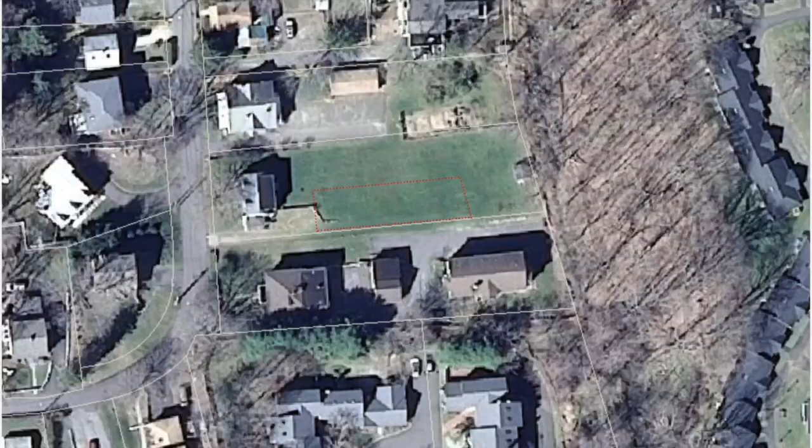It is 7 o'clock on Thursday, September 14th, 2023. And this is the regularly scheduled meeting of the Town of Ridgefield Inland Wetlands Board. In attendance, we have Carson Fincham, Chris Phelps, Alan Pilch, myself, Susan Baker, staff members Artie Paranjape and Caleb. Sorry, Caleb.

Anyway, as this is a public hearing, we will ask Caleb to please read in documents received since last time before we get started. Yes. Okay, so we have the 2004 Connecticut Stormwater Quality Manual, Amy Zemba's resume, extension letter dated August 24th, 2023, correspondence 69 in total, site plan dated September 8th, 2023, drainage report dated September 7th, 2023, LandTech response to Stephen Danzer memo, and Steve Trinkus review dated September 13th, 2023.

We also have documents that have been uploaded starting at 5:20 today. Ridgefield MLS rentals as of 8/30/2023, 8-30g Affordable Appeals List 2022, 27 Abbott PowerPoint presentation dated 8/24/2023, another 27 Abbott PowerPoint presentation dated 8/24/2023, 27 Abbott Avenue previous approval versus approval proposal exhibit, comment response letter to Artel Engineering, comment response letter to the commission, comment response letter to Steve Trinkus.

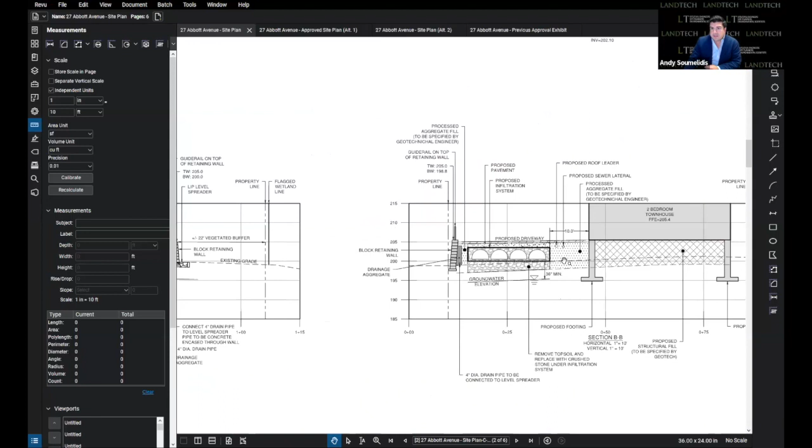Another comment or question was the type of fill material to be used on the site. That's really going to come from a geotechnical engineer who hasn't been engaged yet, but we did put in here that clean structural fill will be supplied below buildings, and clean process aggregate below the pavement areas.

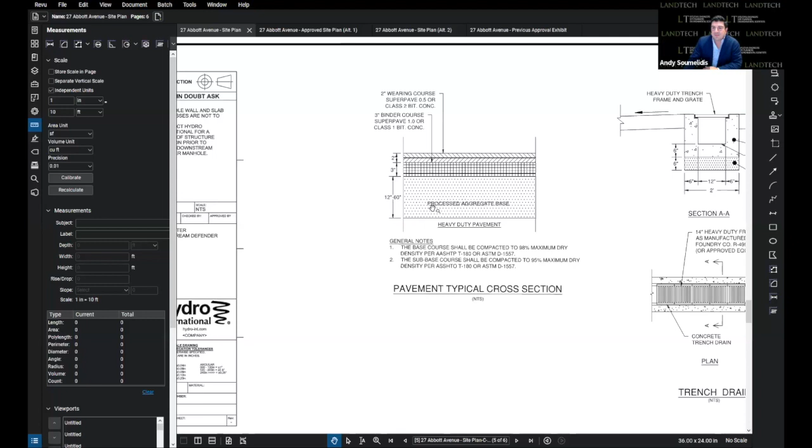So on our detail, let me fast forward. We're showing process aggregate below the paved areas, from 12 inches to 60 inches, so crushed stone aggregate. It's a material that can compact, getting 98% compaction, in order to have a nice smooth driveway. That's what we're proposing for the fill areas below the buildings and under the paved areas.

Another one of the concerns was the bathtub effect or mounding effect with our drainage system sitting between impermeable concrete retaining walls, and how the water is going to drain out. Once it goes through the infiltration system, it's going to create a bathtub effect within the system.

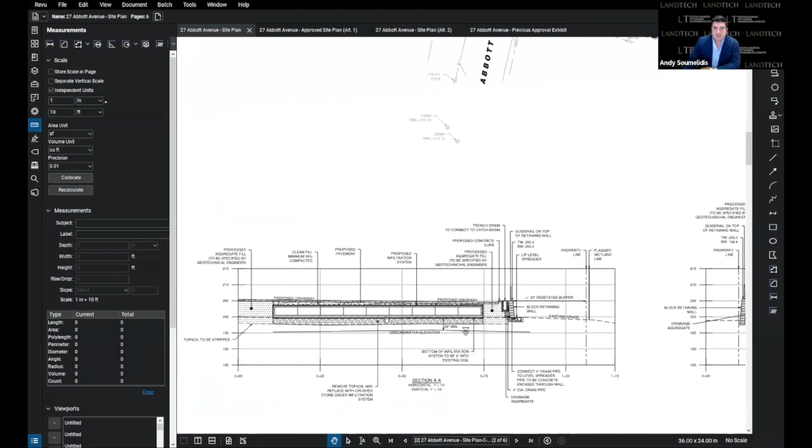So we've added these additional cross sections, further detailing them. What we did was go from a concrete wall with impermeable liner behind it to a block retaining wall. The purpose was that the block retaining wall can have shallow footings. A concrete wall would have to go below the frost depth with a footing, 42 inches below the existing grade, which is this line here. You'd have to go deeper into the existing grade, which would impede the water.

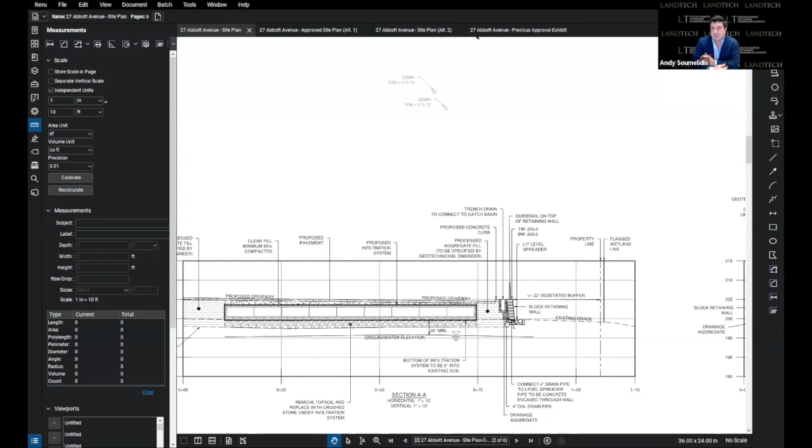What we did in our previous approval to remedy that was basically put weep holes within that concrete wall. Your third-party reviewer was okay with that and wasn't concerned with mounding, but we still heard concerns from the commission regarding the mounding. So with this concrete block wall, you basically bury one block, an 8-inch block, into the existing grade, so it sits a lot higher than being down here with your footing. This allows the free passage of water, not impeding the natural flow of that water going beneath the wall and out towards the wetlands. So we remedied that by doing a block wall.

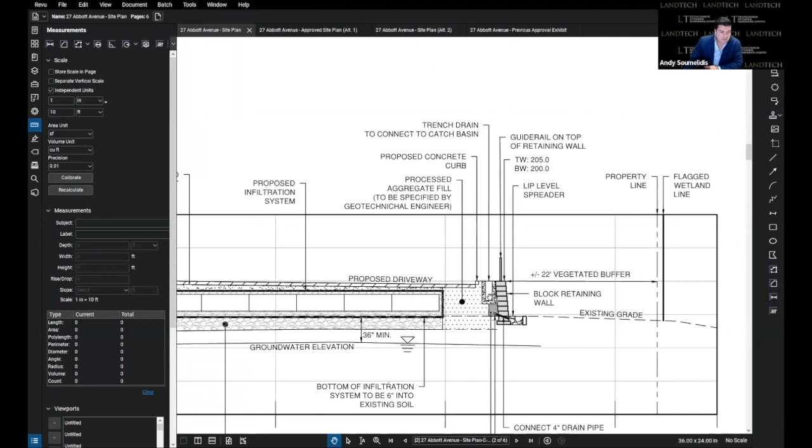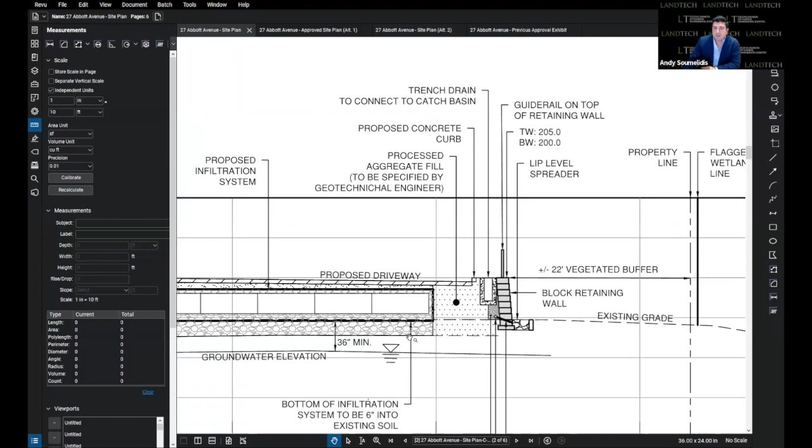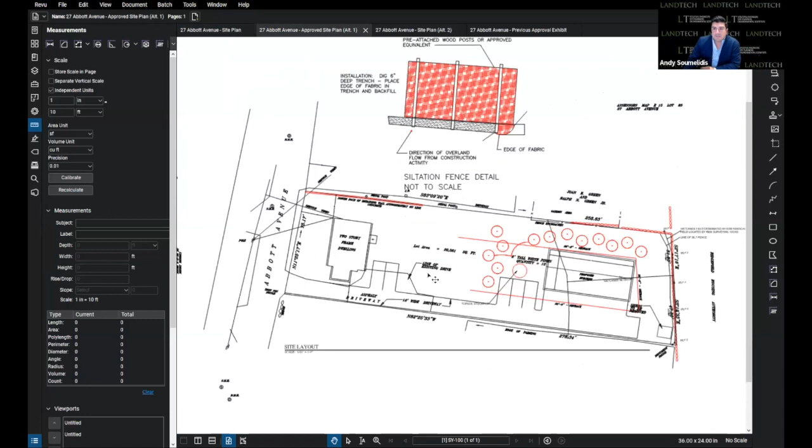Another question or comment was the alternatives. We submitted alternatives, and I'm just going to run through them again with you. This is the approved site plan from this commission. The approval was to maintain that existing dwelling in the front, with a driveway going to the rear to service a new multifamily building in the rear.

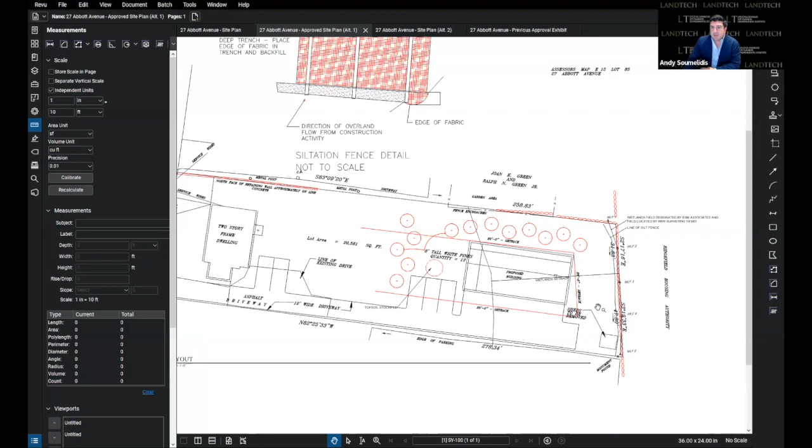That building is 25 feet off the wetlands. As you can see on this plan, there's no proposed buffer and no proposed stormwater infrastructure. There are some pine trees planted in between, I presume, for screening from the neighbor to the north. But again, no stormwater infrastructure proposal, no buffer plantings, and more encroachment towards the wetlands. This is an approved plan that could be built today through this commission. Understood it needs a building permit, but no further review from this commission.

We also presented another alternative that kept all the work outside the 100-foot regulated area.

This again would be more of an apartment style building where you drive underneath with parking underneath the building. That would be 1 story, and then 3 stories above that. You can get 27 spaces here, probably more density. Again, this is another alternative.

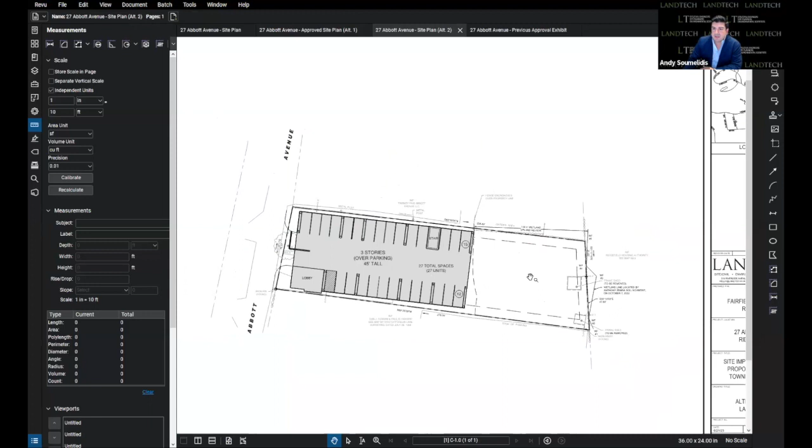We didn't flesh out all the details in terms of grading, drainage, and the such, but we feel we can keep a building outside the regulated area with this type of proposal. I think it would increase the density and probably not fit in with the character of the neighborhood. This exhibit compares that previously approved plan to what we're proposing. All we're showing here is really the impervious surfaces.

You have that existing dwelling to remain in blue here. Outlined here is the limits of that asphalt driveway. And then behind here, you can see the limits of our driveway in our building. The driveway encroaches closer to the wetlands than what's currently approved, and the building encroaches closer to the wetlands than what's currently approved.

We could theoretically put a building in between the two buildings and get the same density we require and move forward with an application, not having closer impact to the buffer than was previously approved, with no buffer in between, quite frankly, because there's no plantings proposed and no stormwater improvements. Yes, perhaps when we go through zoning, we would need to include some stormwater improvements, but through this commission, it was approved as such.

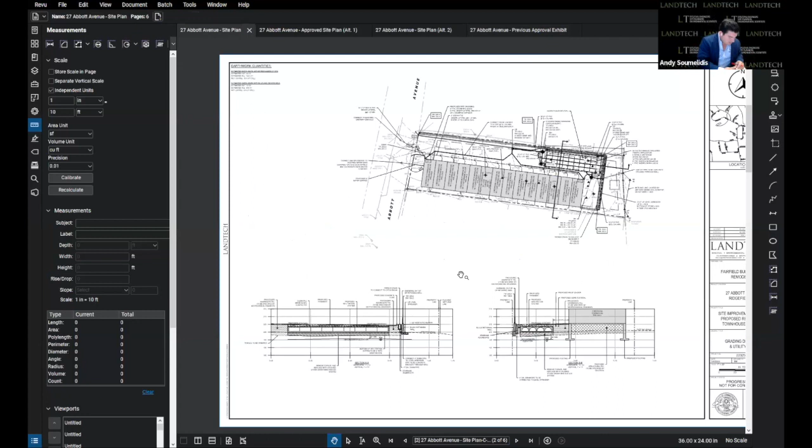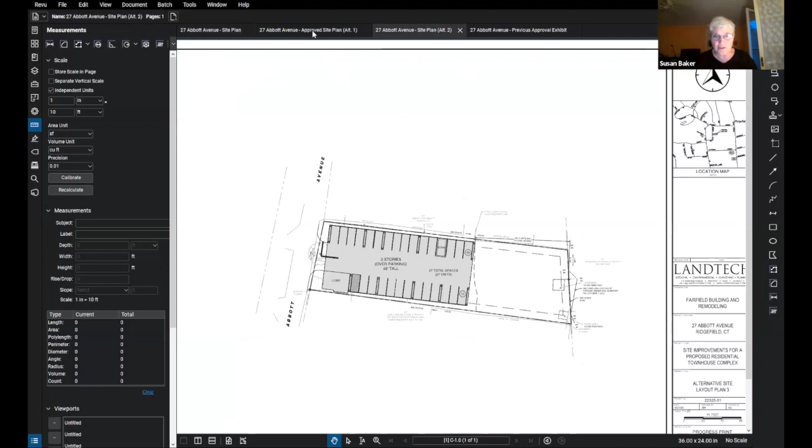I'm sorry, Mr. Soumelidis, you presented, I think, originally 3 different alternatives. Was that alternative one you just showed us? I don't think we had seen that as a suggestion before. Which one? This one? This is not an alternative, this is just a comparison. This is a new graphic, correct? Yes. I just wanted to clarify that this is an absolutely new graphic that was uploaded today, correct? Okay, so no one had a chance to look at that. Sure. This is just a comparison.

If all of you in your presentation tonight could specify when you show us something that came in after hours today, that would be helpful. This is the only exhibit that came after hours. The rest were responses to comments in written form, which we are doing verbally as well. Okay, because I thought there were some PowerPoints. Were those all presented earlier? Yes, this is Brian Carey for the record. Those were PowerPoints that were presented during previous meetings, and I think they were actually uploaded previously. My apologies, the record is so large now. I just wanted to make sure it was in there, but those PowerPoints were previously uploaded.

Okay. And just as a point to make here, I don't know that if you have an approval for something in the wetlands like this, that you could just go back and add to this approval another building. I don't see how that works, because the previous board would not have had a chance to see the whole picture that you were planning to do. Sure, but if we build this today, then we can propose a new building outside the 100-foot wetland regulated area, which is in here. Would it need to come before your commission is my understanding? I don't know. I'd have to check with counsel on that one. Right. That's where I was getting at with it.

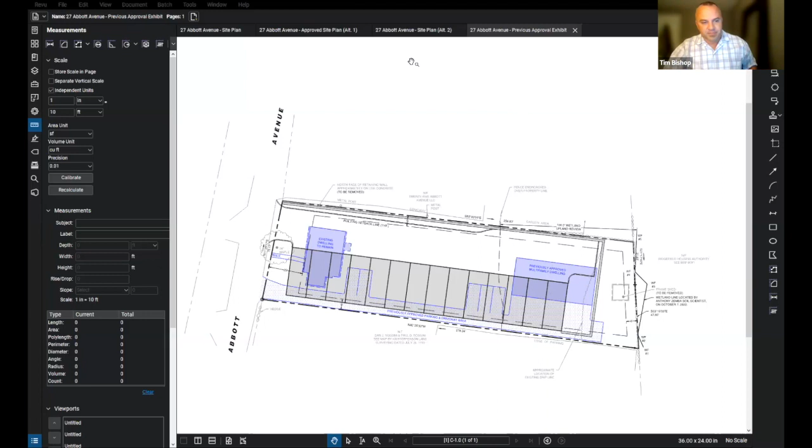Okay. So, yeah, if there's a potential adverse impact to wetlands or watercourses, we have the authority to regulate it. Thank you, Tim. Regardless of upland review distance. Okay, I just didn't want things to get confusing. Sure. I just want to make sure we're clarifying this isn't anything new. This is our existing site plan with that alternate that you've already seen. So this is not a new alternate, this is just an exhibit showing a comparison. Okay, thank you, that's all for clarity.

Okay, and I think lastly, from the commission, in terms of stormwater, I would say, because I think Brian's gonna touch on some of the other aspects, was the snow removal.

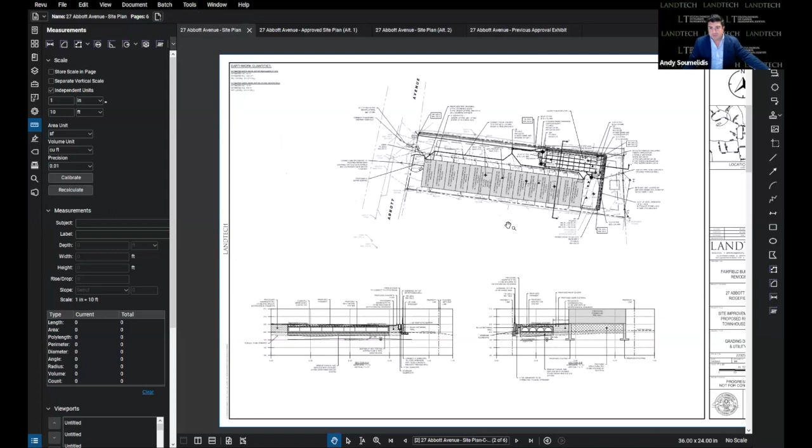Which was a very valid concern. So what we did was, as always, we said this area here would be the snow removal area. But what we didn't have, which we did add, was a trench drain along the top of this wall now. So during snow melt, all that snow melt is still gonna get the same treatment as you would during a rain event. That's typically not likely what happens when people carve out snow removal areas.

But in this instance, we thought it was important to add that trench drain. This trench drain is connected to this catch basin. This catch basin goes to this manhole. That goes through the swirl chamber, the hydrodynamic separator, through the infiltration system. So during a snow event, just like a rain event, you're gonna get the same proper treatment of that: TSS removals, the oils, greases, nitrogen, and so on and so forth. So I think that was all the comments from the commission.

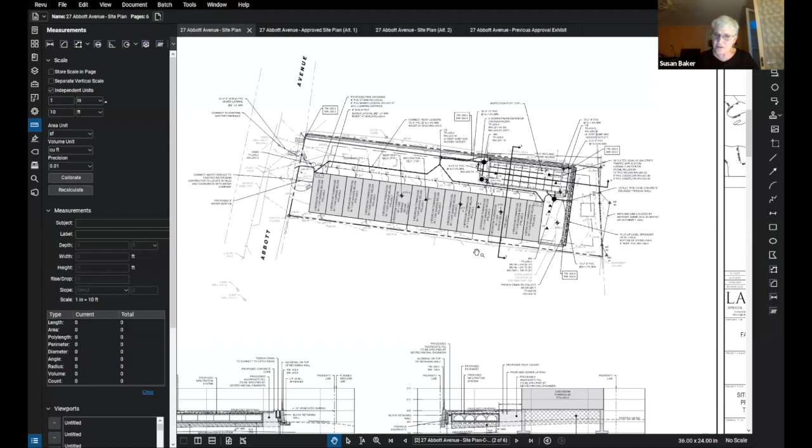May I ask one more question? Sure. Just since we were on the subject of alternatives, I don't think you showed us alternative 2. Maybe not tonight. I might have presented it at a different one. Is what you're saying? Yes, and I thought if we're gonna look at alternatives, maybe we should look at them all one more time. What was alternative 2? It had a bigger apartment building at the end of that row. Yeah, that was the one.

Let me pull that up. I think Brian has that as part of his. Is that okay that he shares that? I can share the screen right now, Andy. I have it up. Okay. Go ahead. Pull that one up. Sorry, it's a little bit.

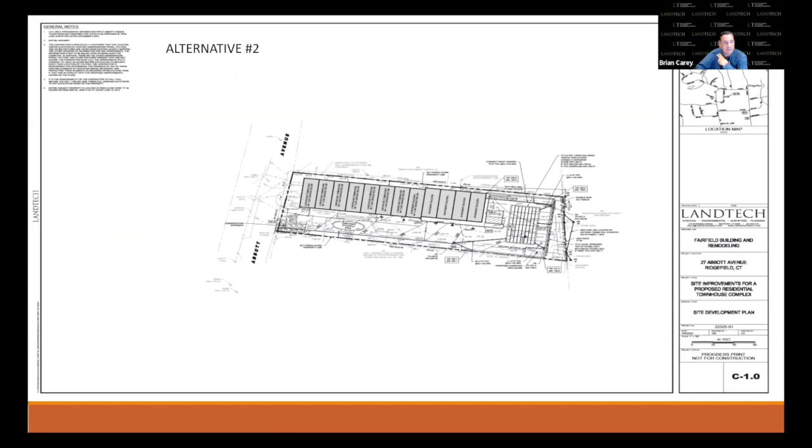But this was a denser proposal as far as apartments. It was a mix of apartments and townhouses. So there's been multiple alternatives that we've worked through, probably more than what we're even listing now, just based on our response to comments received from the third party review and staff, but this was one of the ones that was first presented. So initially we presented alternative 1, which was the approved plan. Obviously, always an alternative is the no build scenario, which is just maintaining the house. We went through, I think in the record, how that wasn't found feasible or prudent.

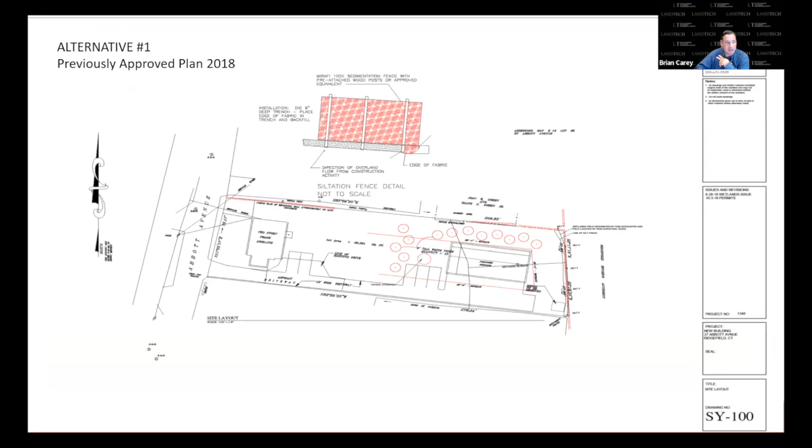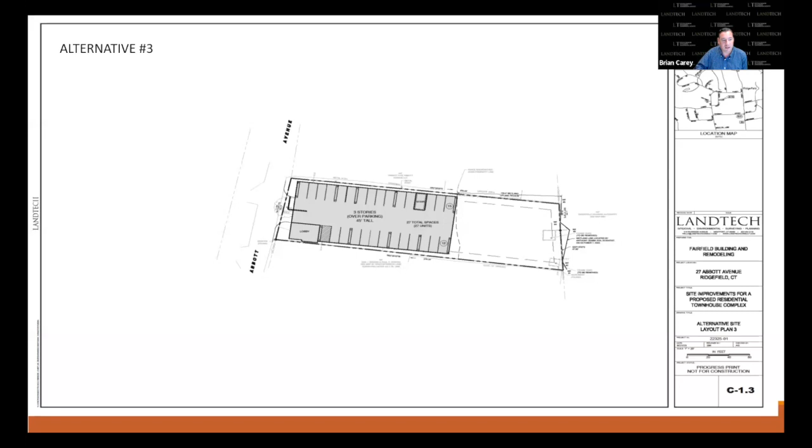This was alternative 3 that we had looked at prior to submitting to the commission. This was one of the alternatives that was shown based on response to comments from members of the commission asking to see what development could be handled outside the 100-foot review area. And then this was a preferred alternative, but we've reworked this as well based on comments received by, again, third-party review and the commission. So Andy, I'll let you show again the preferred alternative.

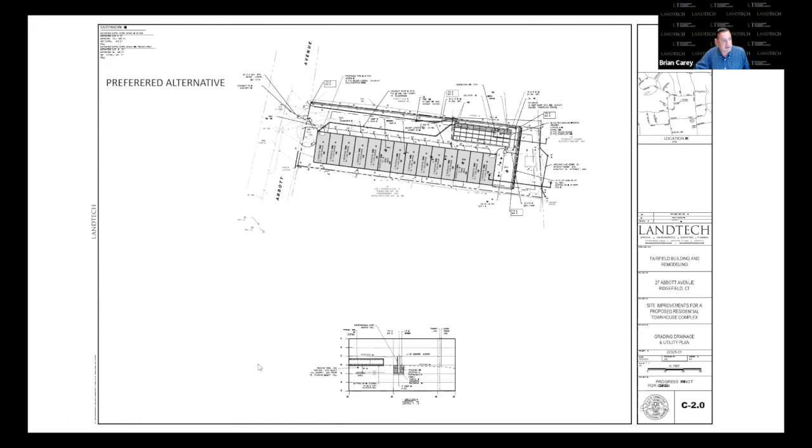I would say this was the preferred alternative 1A because we have updated this to identify and basically address comments that were shared to us. So the new set of plans is our preferred alternative because we do think it's feasible and prudent. It addresses the concerns we've received so far from the third party review, the commission's comments, and it's a better plan working through the comments. So I'll stop sharing and Andy can bring back up his.

Thank you. Appreciate it. We did not, just for the sake of confusion, enter alternatives every time we changed the plan to address comments. We'd be up to alternative 12 or 13 at this point. So just to keep the record straight and not that confusing, I do think we've provided alternatives to show that this does meet the preferred alternative of the applicant while being protective of wetlands. Okay, appreciate that. And that's how we would expect it to be done. Okay, I'm sorry to have interrupted Mr. Soumelidis. No worries.

I'd like now to run through Mr. Trinkus's comments dated August 10th. I haven't seen anything based on our latest submission, but I just want to run through those and how we addressed those as well. The first comment was in relation to soil testing and more soil testing. So we went out there and did deep test holes in the 4 corners of the proposed system.

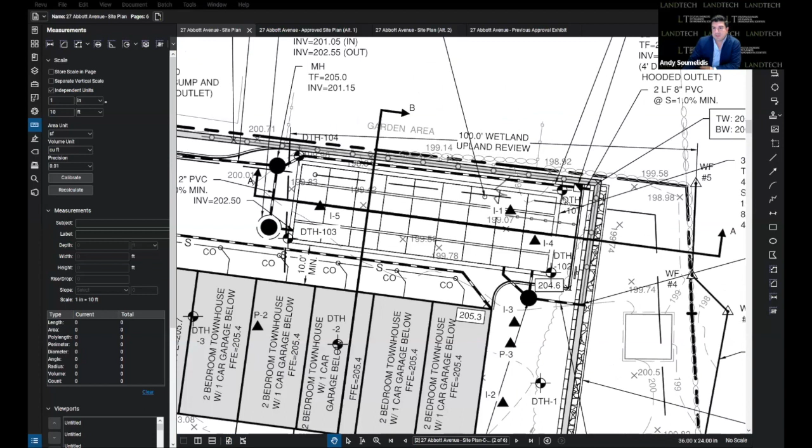Some of the concern was the material that was found in this test hole here, test hole 1, had some fill with some miscellaneous debris in it that didn't seem suitable to belong below an infiltration system. So we did additional testing in all four corners to confirm that there is no miscellaneous debris in that fill. We furthermore did additional infiltration testing, double ring infiltrometer testing, not percolation testing, to determine infiltration rates. Those also concurred with our original results of a 1 inch and 15 percolation rate.

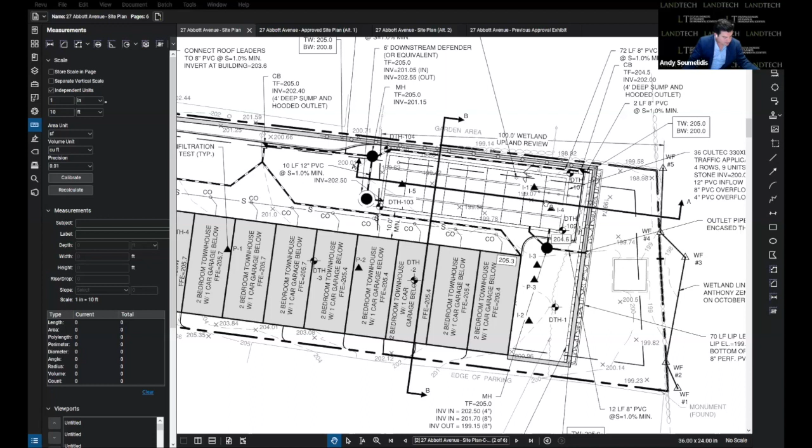So I think we've done some significant testing throughout the site, specifically within the limits of the underground infiltration system. So I think that addressed comments 1 and 2, which were related to deep test and infiltration testing. Comment number 3, again, related to soil testing. Groundwater elevations cannot be confirmed because there was no testing there.

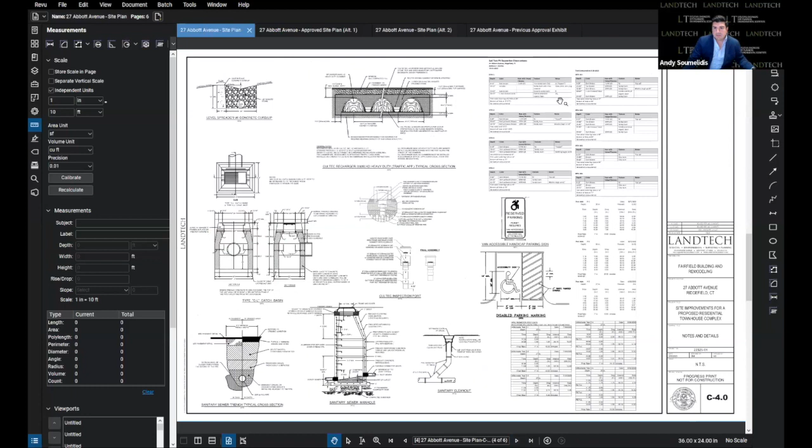Well, testing was done, and the proper groundwater elevation, which is part of this set, was added to all of our testing here. So we confirmed the groundwater elevation, and it is shown as well in our cross section. Cross section A has been revised. This was the cross section to determine the limits of fill. In cross section A here, you could see where the limits of fill are.

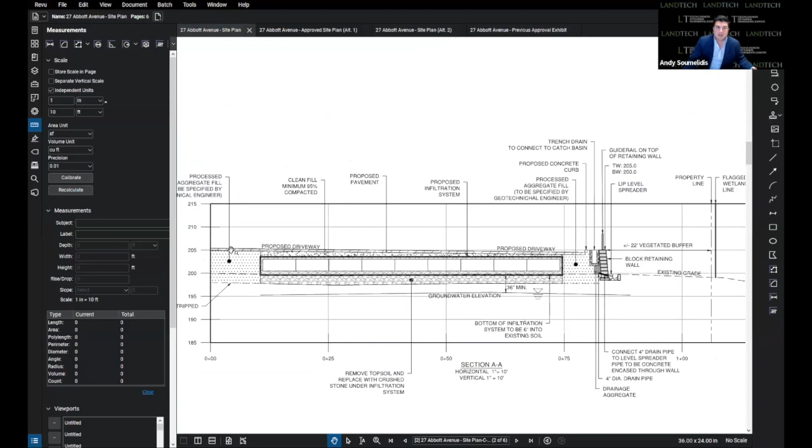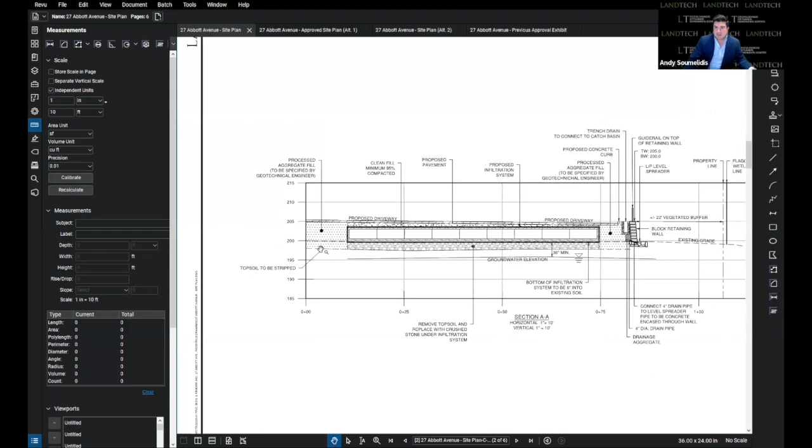This dash line here shows existing grade. This shows finished grade. This calls out precisely where the fill is in relation to the finished grade. We have also detailed that we would strip the topsoil throughout the site and then bring up the necessary fill, obviously to get the right compaction below our paved areas.

Comment 6 was in relation to the isolator row. Seemed like nobody liked that. The isolator row is a row in an infiltration system that's basically wrapped in filter fabric, and all the effluent goes in there originally and then disperses throughout the rest of the system. The isolator row helps settle out the fines so they don't infiltrate throughout the entire system. Nobody was a fan of that. So what we did was add that hydrodynamic separator to make sure we got all of the fines out before any of the stormwater enters into the system.

Comment 7 was the weep holes. Nobody was a fan of the weep holes, it sounded like, either, other than the third-party reviewer who had no issues with our quote-unquote bathtub effect. But we did modify that again to be a modular block retaining wall now, with a shallow footing that is associated with those types of walls. So again, the weep holes have been eliminated. I think that answers comments 7 and 8.

Comment number 9 was in relation to this catch basin bubbling out on a 100-year storm event. That didn't bubble out on our previous proposal, and it doesn't bubble out again on this proposal. So it never bubbled out from the last time we spoke. Since this comment was addressed to those plans, it didn't bubble out of there. So I think that comment was just invalid.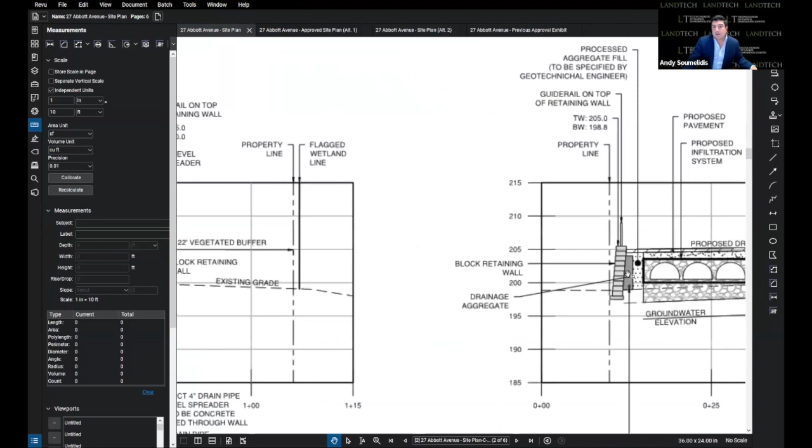Another comment was the footings, the type of footings that would be with a concrete wall, and how they would extend into our neighboring property. As you can see, this is again a block retaining wall. You basically stack these large blocks against each other, they taper back, and there's no footing that's required. It's basically 6 inches of crushed stone that it sits on, and then you stack the blocks above that. So there's no footing. These big blocks just act as a footing themselves, essentially, and they're shallow footings.

The other concern was the snow storage, where we're doing the snow storage, and during a snow melt, it would go untreated into the wetlands. As I mentioned earlier, we did add this trench drain that's connected into our stormwater system that goes through the proper treatment.

Comment 12 was the water quality is held at a fixed storage below the system, and we're not getting the proper treatment. We were getting the proper treatment. So I think that comment is invalid. But for belts and suspenders, we added the hydrodynamic separator. Again, that gets you 100% TSS removal based on the proprietary system, based on the manual, based on the product specification. So that has been added. So I think we got the belts and suspenders there for the treatment.

Comment 13 was talking again about the drawdown of this system. Again, we disagree with that comment, and the drawdown calculations were done correctly. Comment 14 was the MS4 disconnected impervious areas. We've added some language in there to clearly spell out what the MS4 is intended for and how our project is 100% completely disconnected impervious. What that means is all of our new impervious surfaces are being captured and put into a detention system.

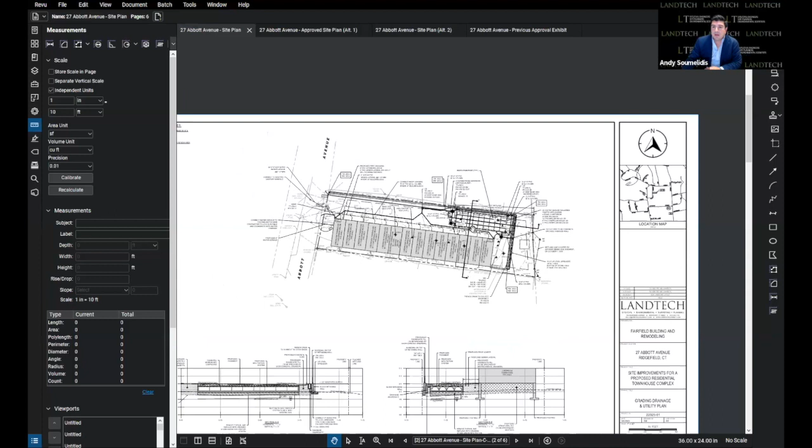But it was a concern of the third-party reviewer for the neighbors. I wouldn't call them a third-party review, the neighbors' consultants. So we addressed that. And I think the last comment was regarding silt fencing, and I think we did a good job now in the construction sequence of really spelling out how this should get constructed

in terms of an E&S perspective. The last concern at the last hearing was we're going to put in this retaining wall and there's no room to put in a silt fence. There's no room to put any protections on that side. So there is silt fence along the rear of the property. This wall, once constructed, would act as the barrier.

It's a fill wall. That means you're digging down minimally to put in a footing and put in that wall, and you build that wall to its top height. After it reaches its height, then you could build in the rest of the infrastructure. As you saw in the cross section, the infiltration system sits below that. It all gets filled in.

So what would happen here is the wall would act as a barrier on the northern side. You still have erosion controls on the eastern and southern boundary of the property. Double row silt fence as required. Those were the comments from the engineer's third party.

I'm going to quickly run through, and I think we did at the last hearing, Mr. Verbicus's comments, which were some cleanup of the general construction notes, and this is the August 24th comment letter. The construction notes on sheet L1 have been revised. The fill material was another comment that you've heard of earlier that we've addressed.

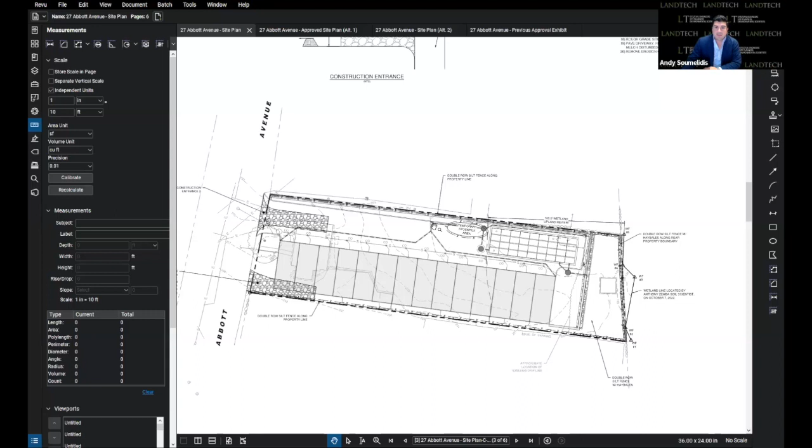Comment 5 was in relation to basically the geometry of the pipe bends and how they were going into the stormwater system. So we cleaned those up as well. And comment 6 was basically just showing the water lateral, which we showed connecting into the building. As stated, it's not a wetland issue, but it was a comment.

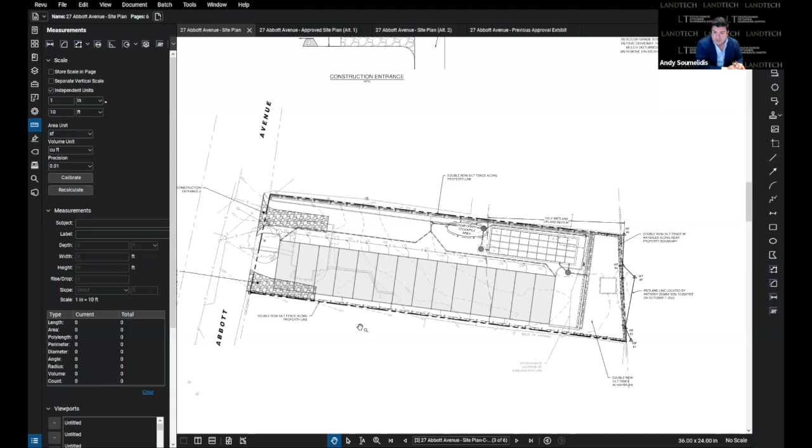The comment we received about 15 minutes ago, also not having enough time to really review it for this hearing. So this is dated September 14th. The first comment was in regards to soil testing. You heard that already earlier. The extensive testing we did for this infiltration system.

Just to be clear, the manual requires one test hole in the vicinity of this detention system. We have, I would say, 6 test holes in the vicinity of this infiltration system. Deep test holes. And 1, 2, 3, 4, 5, 6, 7 actually, infiltration testing in the vicinity of this detention system.

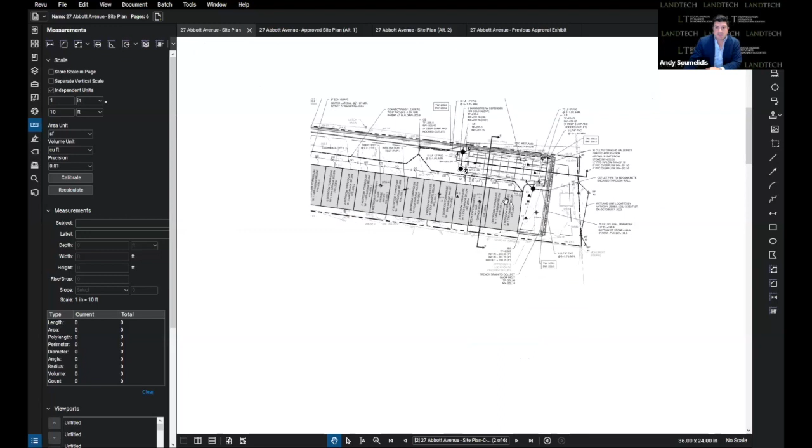Comment number 2 was in relation to the segmental block wall. Again, the pipe that discharges out from the segmental block wall, which is basically drainage behind a wall, is greater than 10 feet away from our infiltration system. Plus the bottom of our infiltration system is below. You can see here the crushed stone goes way below the invert of that segmental block wall.

So I don't see how the water short circuits. Short circuit would be if the water went right in here and didn't get the proper treatment through the 3 feet of unsaturated soil, which you would get here. So I'm not sure where he's concerned about that.

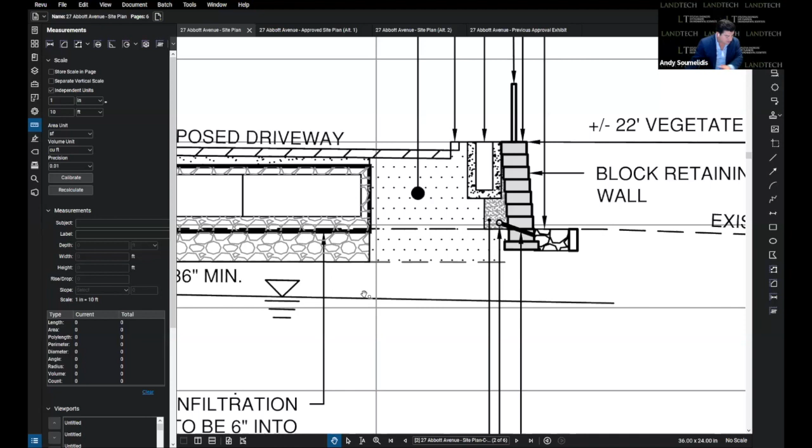Comment 3 was the wall and drainage structure should be drawn to scale. I'm not sure where that is in relation to. He doesn't point out, so I'm not sure if it's in plan view, section view, or one of the details. Seems like just for clarity. Number 4, cleanouts are recommended for roof drains. More than happy to provide cleanouts at these bends to get into the roof leaders. Not an issue at all.

And then comment 5 was the stormwater modeling shall be updated separately. This is the one I really had a question on. I'm not sure where he was going with this or what the question is. Proposed 8-inch diameter pipe appears to restrict flow. In our model, we are reducing the flows for all the storm events up to the 50-year storm. So I'm not sure what that comment really means, honestly. So that's the one I really needed clarity on.

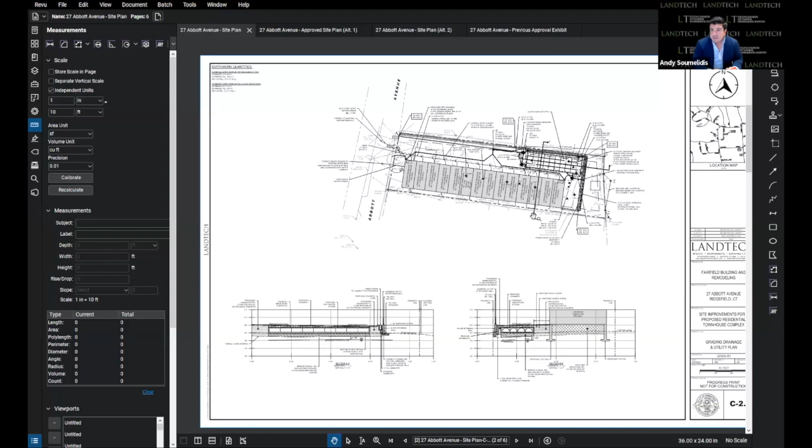Our drainage system, as you heard from Mr. Verbikis at the last hearing, was sized properly, was designed properly, would provide the runoff reduction, would provide the water quality. I think what we've done here is add more belts and suspenders to it. So that's what I have as my presentation. I'm going to hand it over to Brian, unless you guys have questions right now on the stormwater issues. I'm more than happy to answer now.

Any members at this time have questions that Mr. Soumelidis could speak to? Just one clarification. Tracy, yes. I think the board said we were concerned about soils and permeable pavers. There wasn't clarity. There seemed to be one of the peer reviewers said that the soils couldn't handle infiltration from permeable pavers. So I think what our comment was, we wanted the engineers to figure that out. And we didn't feel like we could really say yes to that until that was resolved. So just for clarity, that was our comment. But we said we would leave that to the engineers to figure out.

Sure. Do you know who mentioned that? I think Mr. Trinkaus was concerned about the soils being able to handle the permeable pavers. So I personally didn't feel like I could recommend them until that was resolved. Sure.

Alan? Yes, just a question for you, Mr. Soumelidis. On your drawing C-2.0, you're now showing a, I'll say, a more extensive depth of stone underneath the chambers. And looking at section BB, it doesn't appear that you would have 3 feet of unsaturated soil underneath there, which I know you just claimed there is. But looking at this section, it appears that with that thicker layer of stone, the amount of soil beneath the stone below the chambers would be much less than that. So you're not getting the 3 feet of unsaturated soil.

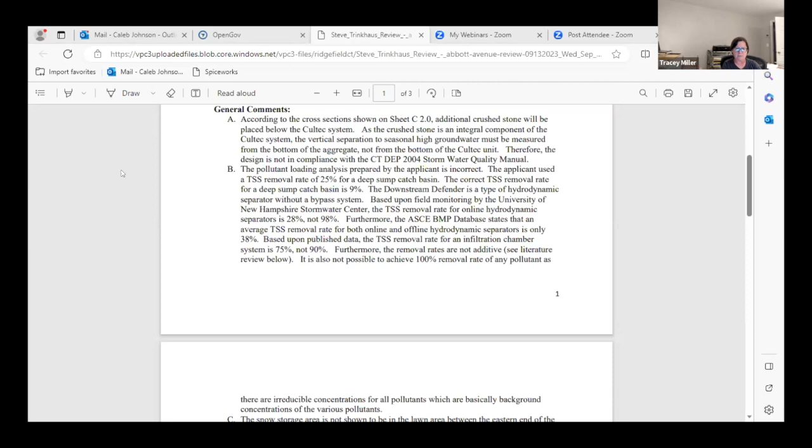And so I wondered if you can address his question here, and if you want to, you can look at the test results that the company has on their website. It seems like a discrepancy to me, but maybe you have an answer to this. It's very confusing to me. Sure, I'll get you an answer shortly. Okay. Anyone else at this point, while that's going on? Doesn't look like it. Okay. Caleb.

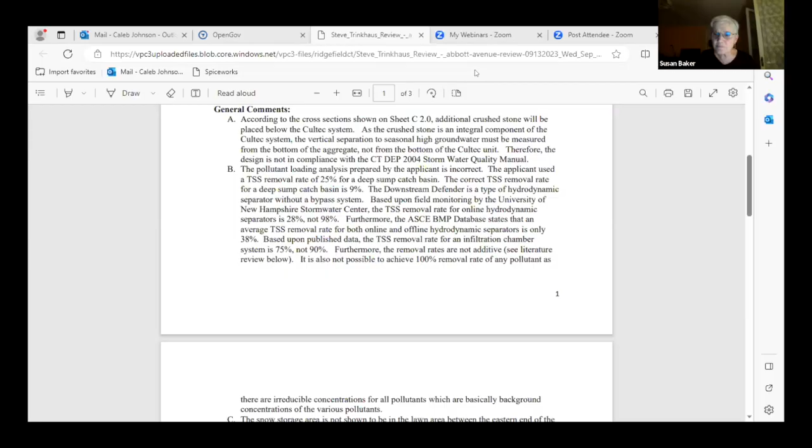Yeah, thanks. So I guess we're going back to Brian Carey then.

Is that it? Yeah, so I'm just going to address some other comments that were brought up by the commission, but also in a memo that was submitted by Steve Trinkhaus, which we'd submitted responses to. I just want to hit on a couple issues: one being water quality, one being the discussion of the buffer and the planted buffer, and then third, at the last meeting, there was some concern regarding the tree protection for some of the offsite trees. So just to go through, I'm just going to summarize quickly.

Because I did submit into the record a response to Mr. Trinkhaus's letter that I submitted September 18th, there was a lot of comments that were drawn from the letter that was speculative, and I just wanted to address them. The proposed project - there's been a lot of speculation to say that the project impairs or degrades the primary functions of the off-site wetlands. There's been nothing in the record that shows that to be the case definitively. It's been speculative.

Again, we've discussed in depth about direct inputs to the wetlands that have been shown to occur in the existing watershed, which is highly urbanized. Our project is eliminating all direct discharges to the wetland from the project site. All of the stormwater associated with our project is being treated through the hydrodynamic separator and through the Cultec system, and then is also going through the level spreader into what is going to be a planted riparian buffer.

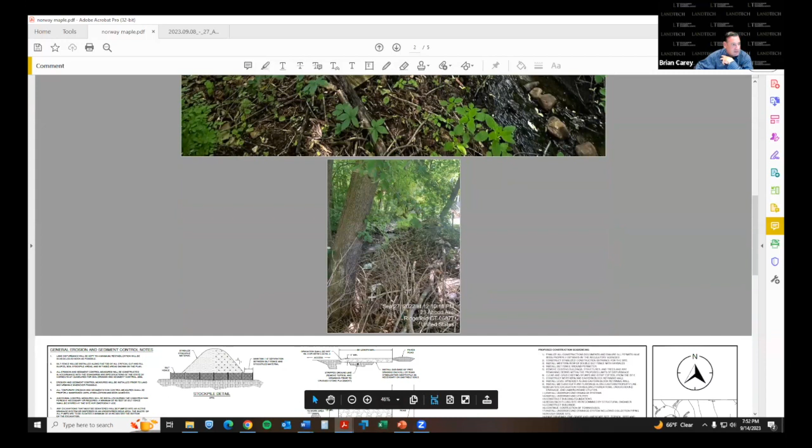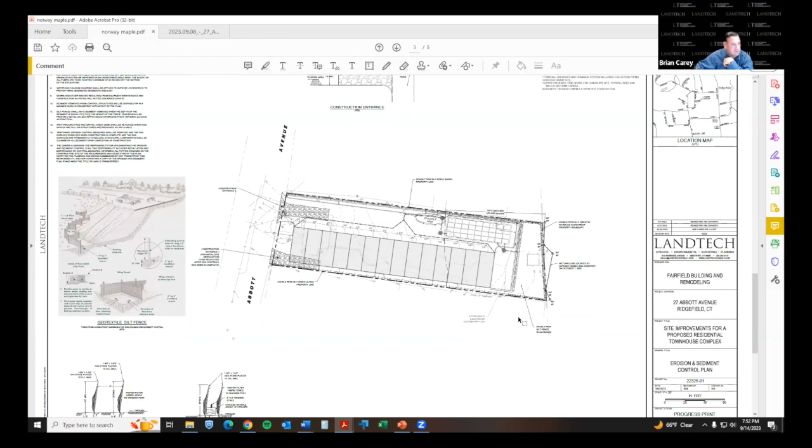Here's a picture we took of the same tree dating back to 2002. But as you know, Norway maples are invasive in the state of Connecticut. The drip line for the tree does come within the wall that we will be installing, but that in itself is not necessarily a problem.

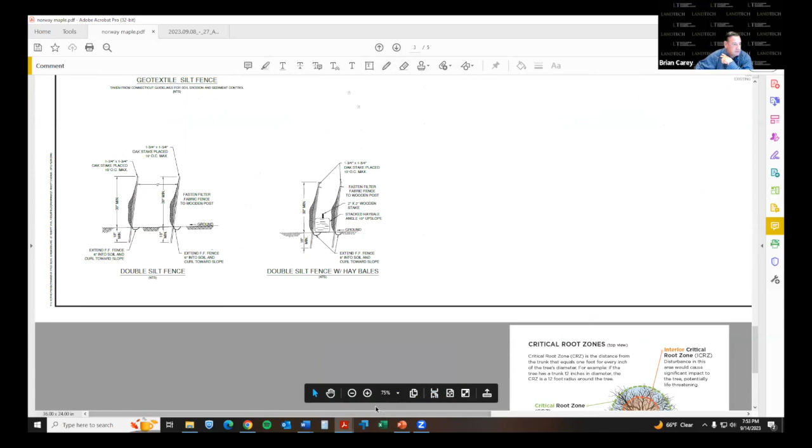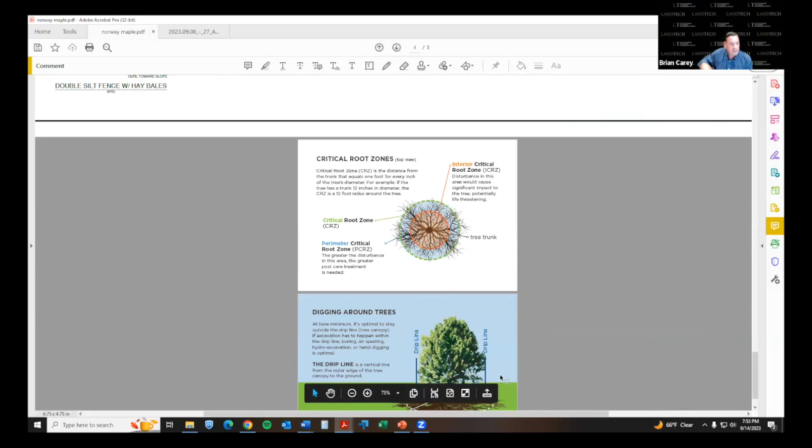The critical root zone is the problem, and the way you calculate the critical root zone is by applying the formula provided here, which is basically 12 inches for every 1 inch diameter breast height. That tree being a 14-inch DBH, you're looking at the critical root zone basically in this area, which again won't be disturbed other than hand digging. So as a professional arborist, I do not think that will cause a problem.

And truth be told, the benefits of even removing that Norway maple, even though it's offsite, which we can't do, would probably be greater than trying to save it anyways. Norway maples, as you know, have a lot of negative impacts on the environment. One of them is to outcompete native spring ephemerals. They also tend to be heavily susceptible to wind throw, which would cause further erosion along the bank. Generally, they just outcompete natives, including sugar maples and beeches and other more beneficial species.

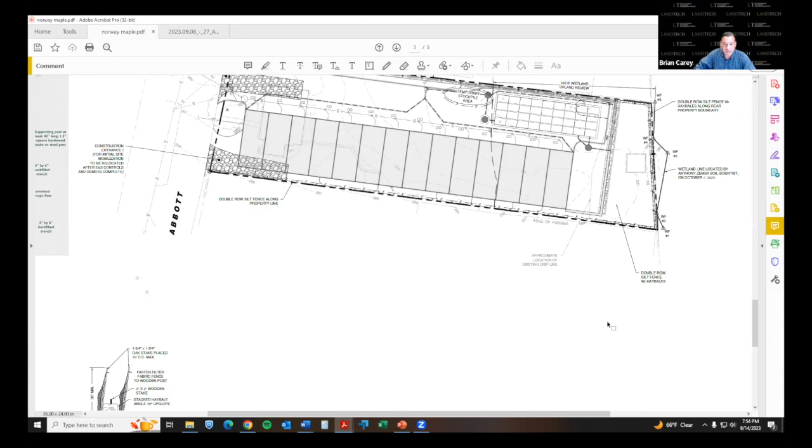So for the sake of the argument, the project will be protective of the tree, but I guess the question really is, do we want to be saving Norway maples? It's not necessarily a practice that's basically carried out. I think that's all I have to say in response to most of Mr. Trinkhaus's comments.

I think the big takeaway is that all the mitigation measures that have been developed into the project are protective of the adjacent wetlands, especially our stormwater design, the establishment of what we believe is an adequate upland buffer, and the extensive plantings we're going to do within that buffer. Furthermore, once the buffer is established, the applicant will be performing routine maintenance to make sure that no invasives are outcompeting the buffer that is being planted, and that's something that we will do on a semi-annual basis, which can be made a permit condition if chosen.

So that being said, I can answer any questions, but we really feel that all of the impacts have been mitigated, and that the project isn't any more intensive than ones that have been approved in the past by the commission in the relatively recent time frame of 2 to 3 years, and is also consistent with the surrounding watershed and the level of urbanization that we've identified.

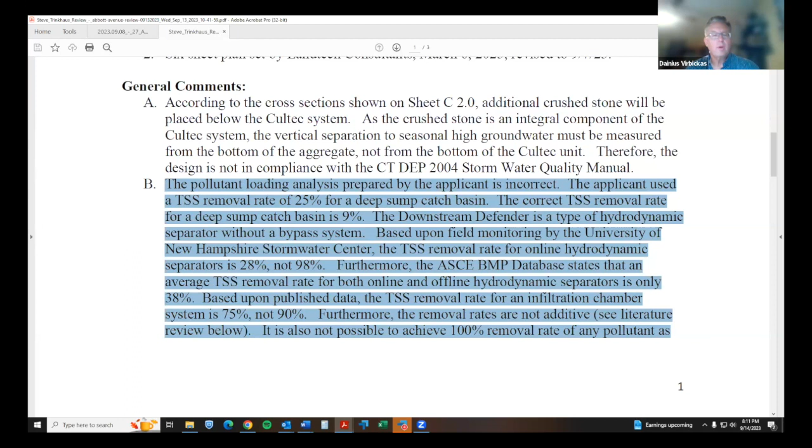So some manufacturers are testing sand and gravel and finding 98% removal or what have you. But what we find is that the stuff you really want to try and catch, in addition to that, would be the fines, and some of these products are better than others. When I try and design, I try and do similar to what Landtech has done, and just put in a larger unit - overkill rather than try and squeak things through.

Again, deep sump catch basins, I don't know the percentage of removal. But again, you find in the catch basins that there's oftentimes sand and leaves, an occasional baseball or grass clippings. And that's the kind of stuff that stays at the bottoms of these catch basins.

And I think I'm probably going to repeat myself, but we do go out to a number of condominium developments and apartment complexes where we do look at the stormwater management systems, and of course we find sediments and sands in these deep sumps, or even in 2-foot sumps, they tend to work.

And then you've got your Vortechnics or swirl concentrator at the end of the line before it discharges into a detention basin. And more often than not, we note that when there's a swirl concentrator at the end of the line, there's no real indication of any kind of sediment or silt or anything that gets out to the detention basin or open area for further treatment or detaining things. So I think these products and means work.

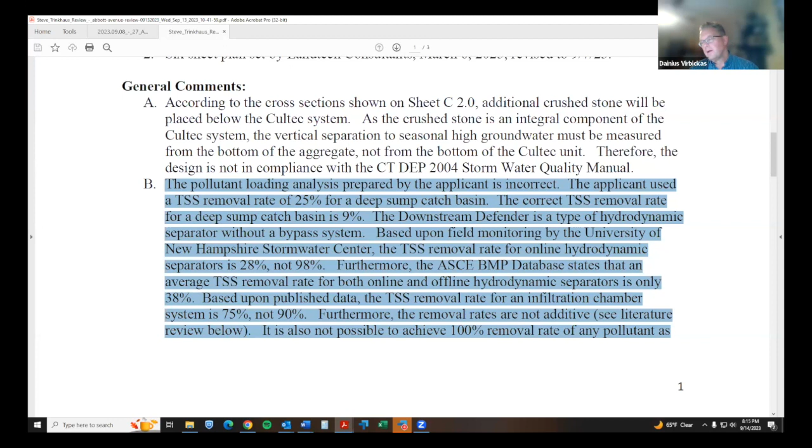And of course, I can babble on about yesterday's storm and the torrents of rain and sediment and sand and silt, regardless of the best management practices. I was driving and saw DOT construction sites where, on a huge storm event like that, I don't think there's really anything that you can do when you get 3 inches of rain in an hour.

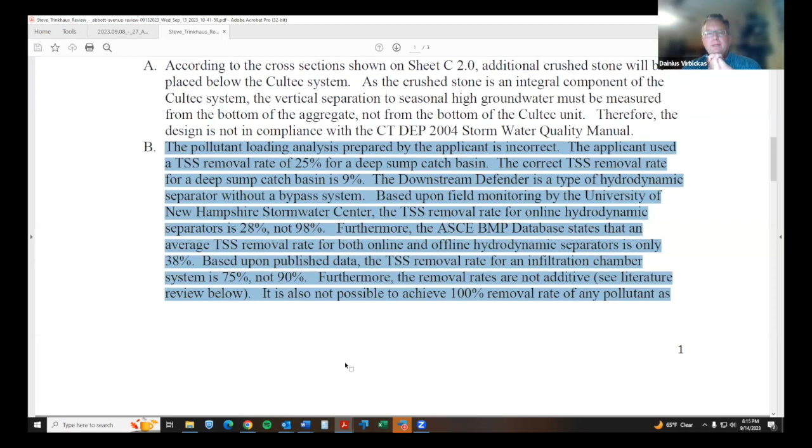And in one instance where I'm monitoring, the 3 inches of rain in an hour equates to greater than a 100-year storm event, between 100 and 200 year, with the intensity of it, not necessarily the inches amount, but the intensity. Anyway, I think I've spoken too much, but I'm happy to answer any questions that anyone might still have. Thank you.

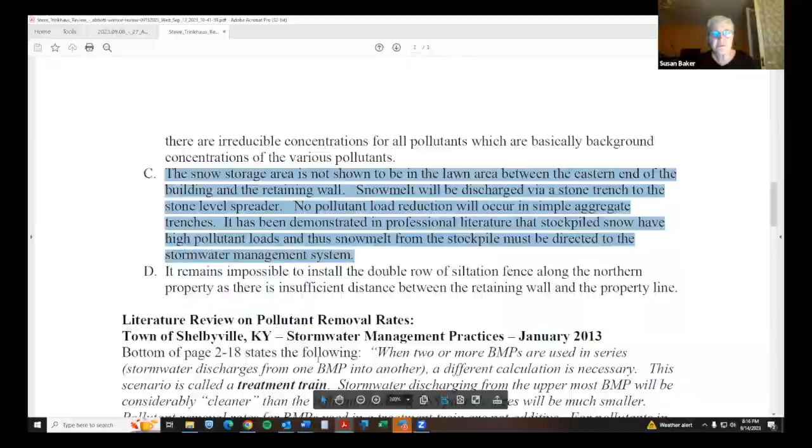Tracy, are you? Well, I have 2 more questions for Mr. Virbickas, but I don't want to hog the time. So if other people have questions they want to ask, I can come back. Okay, is there anyone else with questions? Mr. Carey, I think we can take this down now, so thank you. Well, I'll go ahead and ask while people are thinking.

Since you mentioned salt, does the system handle salt in any way, or does that just get flushed through? Not as far as I'm aware. Your salts, if they were to be removed, it would likely be through the infiltration and into the soils there. So I suspect that your first flush, the first bit of rain that gets through the system, is where your salt is going to be, and the way that this system is designed, that first flush infiltrates into the ground.

So at best, we're likely collecting and not allowing that water to go into the wetland as it would, say, if it were flowing directly from a road or a street catch basin.

So my understanding is that salt just moves through soil. I think they both have the same charge, something like they both have a negative charge, and soil doesn't really absorb salt. Salt just moves through soil until it hits water. So is that correct? Are you aware of that, or have you heard that?

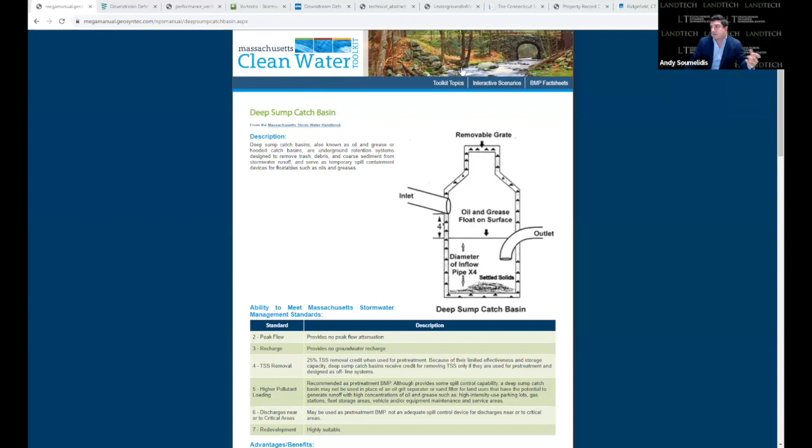This is the Massachusetts Clean Water Toolkit. TSS removal, 25% for deep sump catch basins. It's also part of the Connecticut Water Quality Manual. I'll bring our treatment train back up, and actually let me just jump to the Downstream Defender literature. Again, that does the removal as required.

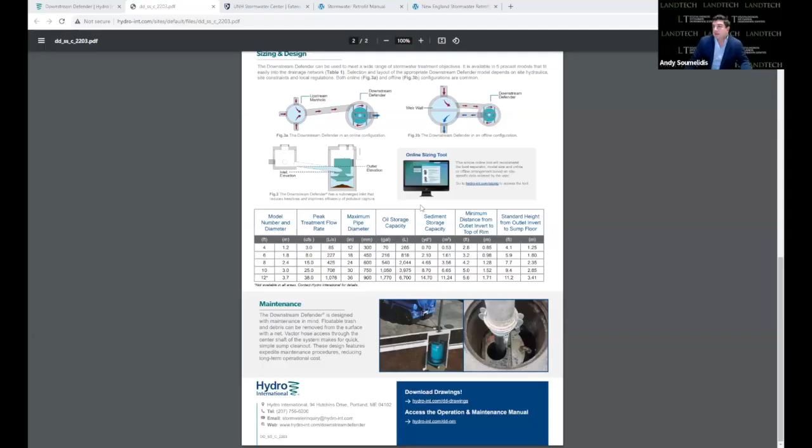Here's your Downstream Defender. Here are their specification sheets. This is what we specified as part of a proprietary system, proven method, used throughout Connecticut, used not on residential sites, mostly on large commercial sites. Again, the 6-foot diameter that we spec'd out.

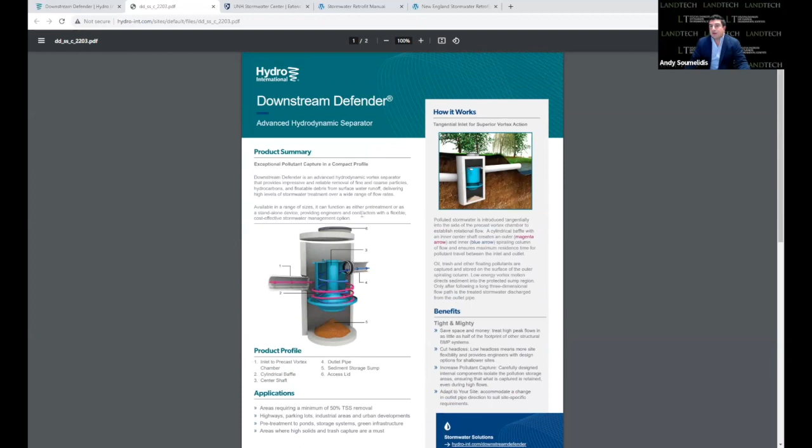The peak treatment flow is 8 CFS. Our 50-year storm is 1.94 CFS. So this is where it shows you the removal; it says 80% removal with 8 CFS. We are a quarter of that with our 50-year storm. So I just want to show that those are the proprietary systems.

I'm looking for this New Hampshire Stormwater Center, trying to find where it says it only gets 28%. But what I did find on the New Hampshire Stormwater Center is underground infiltration systems, which Mr. Trinkhaus fails to mention in his latest staff report. He only points to the deep sumps and the hydrodynamic separator. Underground infiltration systems on their own, based on the literature of the New Hampshire Stormwater Center, have 80% removal of TSS solids.

So even if you didn't have the deep sumps with hoods, even if you didn't have the hydrodynamic separator, you're still getting 80% removal just by the underground infiltration system. So I just wanted to point that out. And then I'll go back to the treatment train to show you folks how that works. We are not taking credit. As Mr. Trinkhaus said, when you get to 98%, you don't take 98%. You see here, the amount removed now is only 0.74.

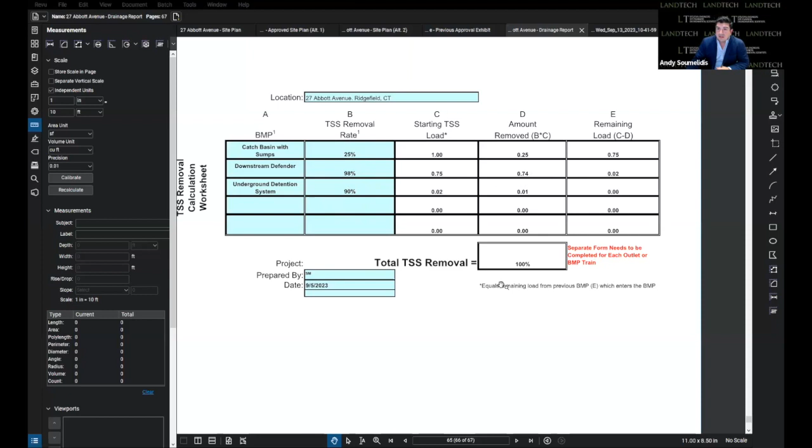So this is the treatment train, and it is designed properly, and the calculations are right. Underground detention systems in Connecticut are 90% removal of TSS on their own. So here you get your treatment train, and here's the calculation of 100% removal of TSS solids. The requirement is 80%. I think there was another concern, let me just get into my notes.

Some of the drainage patterns I heard from some of the neighbors: the property drains west to east into the wetlands. We are not changing those drainage patterns. It still drains west to east. If it was draining on adjacent properties, maybe, but everybody's in uproar about, you know, all the bad things that are happening to the wetlands based on the stormwater improvements.

So I just want to pull up, I've shown this at other hearings, maybe there's folks that weren't here at previous hearings, the aerial of this area and the amount of development within 100 feet of this wetland system. So here, again, this cyan line is your approximate limits of wetlands. The first dashed line here is your 50 foot, and here is your 100 foot.

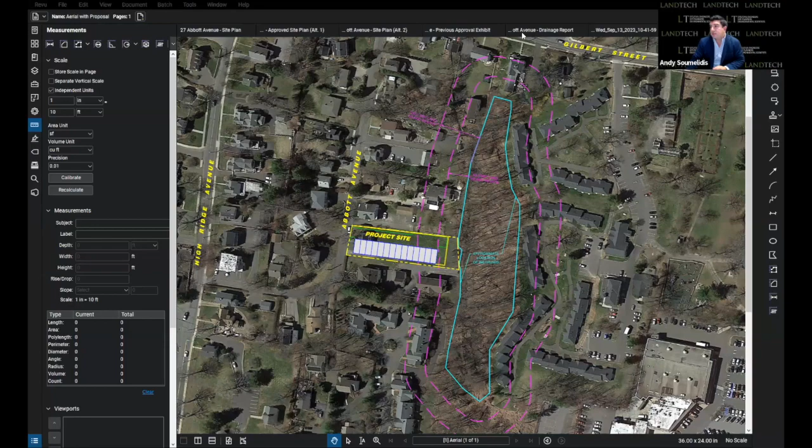And you can see the amount of development directly adjacent to these properties: homes, pavement, a ton of impervious surfaces within that 100 foot and even 50 foot upland review area. So I just want to point out how this area has been developed, where we're at in this area, and what we're looking to do. Again, I just want to share that for folks that maybe missed it, but I think it is a pretty telling exhibit.

And again, I just want to lastly just touch upon, it seems like we narrowed it down to 4 comments from Mr. Trinkaus that were on this latest comment letter. So after all these revisions, all the back and forth, I think we're down to 4 comments. Again, the last 2 being the snow storage. The snow storage is not shown in the lawn area on the eastern side.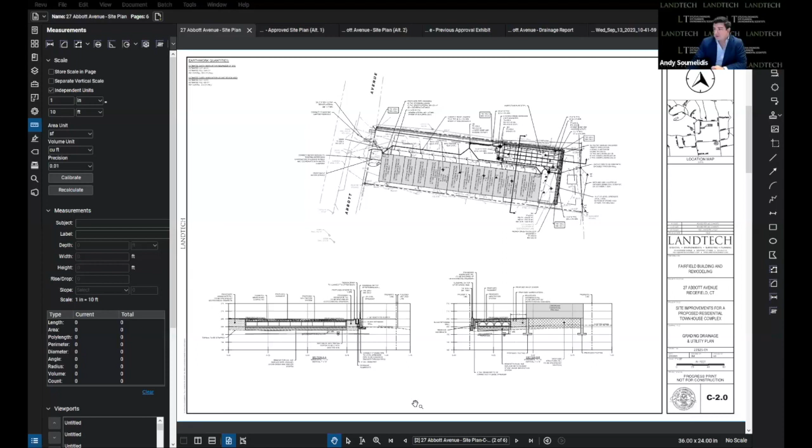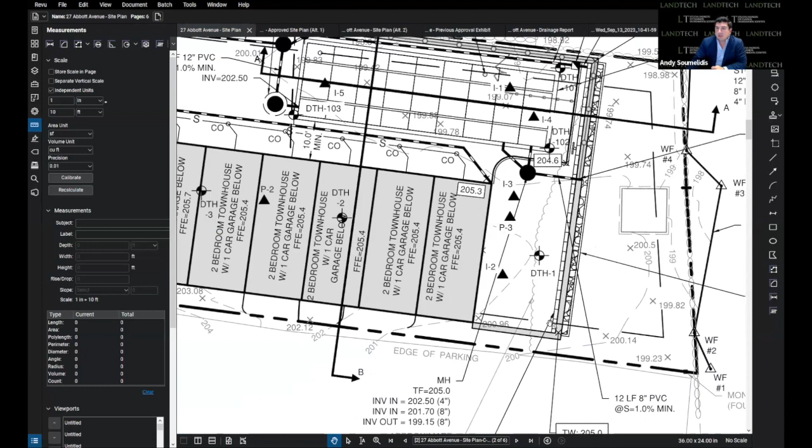So let me just pull up my site plan again, so I could show you folks where the snow storage is. It is shown on our plan. It is called out on our plan: snow removal area. There was a big concern that it was going untreated. The snow removal again is in this area, and we have that trench drain along the top of that retaining wall, and it goes through that proper treatment as the rest of the stormwater. So that was comment number 3.

And then comment number 4 was, let me just pull it up. I didn't have these printed, I'm sorry. Oh, the double row silt fence on the north side. I think I already addressed that earlier. It's a construction means and methods. The retaining wall will be built first with no fill placed, so the retaining wall will act as the barrier, and the silt fence is not needed at that point. So I think that addresses his latest comments.

I think we addressed Mr. Verbickius's comments, and I think our proposal, in my professional opinion, meets the town of Ridgefield's drainage requirements, stormwater requirements, the 2004 Connecticut Water Quality Manual, and also bits and pieces of the 2023 one that we were asked to adhere to that's in draft form. I'm still happy to answer any questions at this point. If not, I'll turn it over to Brian.

Thanks. I do have a question. Sorry. From the company that you're using, I uploaded some testing results that they had on their website that were different than the testing results that you're showing. And just for the record, I'd like for those to be seen. Caleb, I don't know if you can pull up. I think there was one from Canada. Yes, I can pull them up. I also sent you two from New Jersey and one from Virginia. They didn't get loaded, but I guess we can load things during the meeting

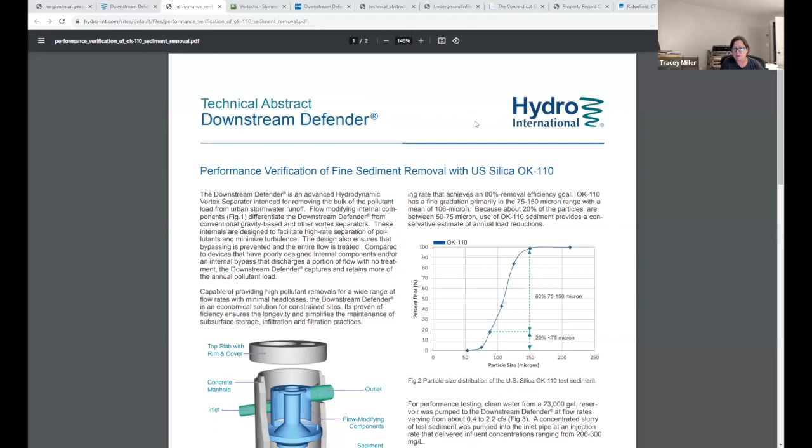I'm sorry, Madam Chairman, this is supposed to be our final rebuttal. There's not supposed to be questions and answers at this time. Well, I did ask him to look at those when I asked the questions, and he didn't respond to that, so that means you didn't answer my question. Here, I'll share my screen. That was Downstream Defender, the hydro. This is what we're specifying. This is from their website, directly from the manufacturer. I uploaded some testing results also from their website that other people did, and I loaded them for the record, and I would like you to look at those and explain to me what I'm seeing.

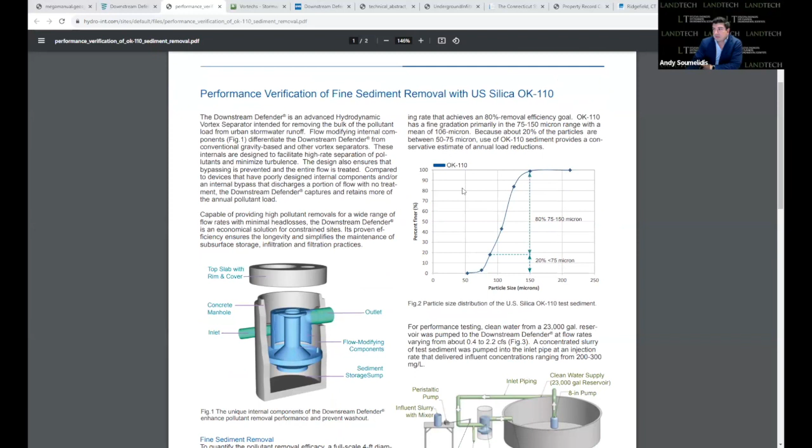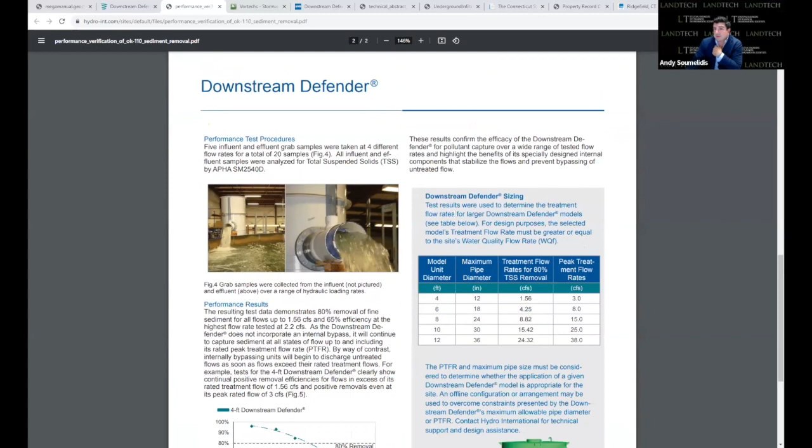Caleb had his up, and then you interrupted. That's not what Caleb had. Right. Well, I'm showing here a 6-foot diameter manhole, which is what we're proposing. Treatment flow rates for 80% TSS removal. This isn't what I asked you to respond to. But you asked me to answer your question about TSS removal? No, I asked you to look at the things that I uploaded on the website and explain to me what they are. Sure.

Can somebody send them to me? Caleb, can you pull that up? Not the Canadian one, the Jersey one, I guess. I didn't get the other two, Tracy. I have this one, and then the Canadian one. Okay, I guess the Canadian one. And just let me know which page to go to. They were all in that same email, so you might just have to scroll down. Okay. I apologize. If you can't find them, then I guess the Canadian one. There's these two, and then this one as well. This one or the other one? I don't know. Any New Jersey one, I think, would be pertinent. These are the two.

Can you share it? Sorry. Sure. And what page? I think you have to scroll down. Is it this one, Tracy, or this one? Well, this one's easier because he puts it on the front page. So

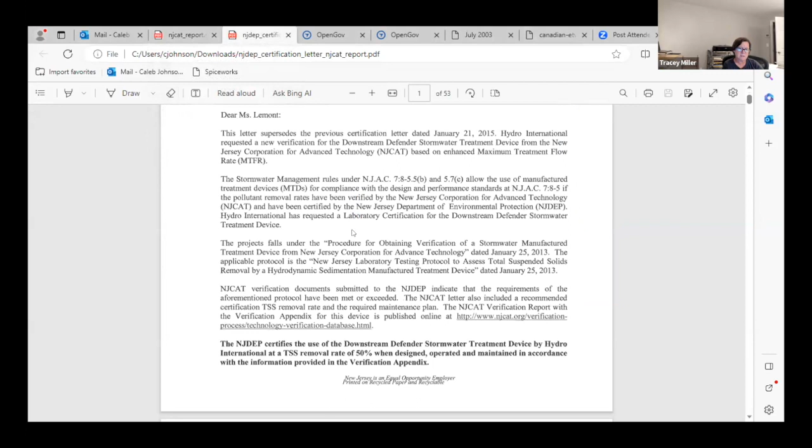Is this a different system or is this? So he says 50%. With the information provided in the verification appendix, is that part of that? Can we go to that page? Do you know which page that is, Tracy? So I just went on the website and this is what they put on their website. And so I just pulled down some of these.

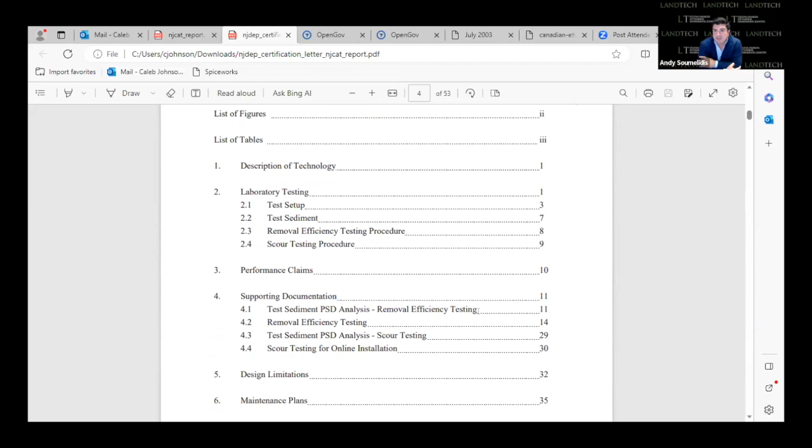Sure, I could probably answer it. If the flow is greater than what it's designed for, you're not gonna get the 80%. So that's probably what this is saying. There's different flows; they make them in different sizes. So if you have a large enough system to handle the flow, that's where you get the 98% that we're getting. So typically, yes, you get the 80%. And that's what I was going to show through this chart here, and I can probably explain that with my chart now to answer your question.

At the top, above Dear Ms. Lemont, it says TSS removal 50%. Correct. So let me answer that. If I could share, please, Caleb. Okay. Yep. This is where I was going with my answer. So here I was showing the 6-foot diameter, and then it tells you the maximum diameter pipe that it can handle. It tells you the flow for 80%, again, 4.25. Our flow is 1.94. And it tells you the peak treatment of 8 CFS.

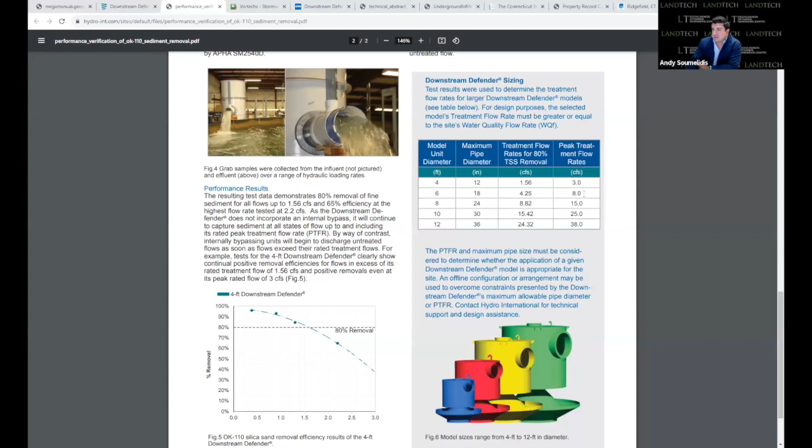If you go here, this shows an example of a 4-foot Downstream Defender. Depending on the flow, it tells you how much percent removal you can get. So if you go across here on the 50 and then come down, the 4-foot diameter Downstream Defender gets 50% removal when you have over 2.5 CFS. There's a chart also for the 6-foot, the 8-foot, the 10-foot. So it's a curve. The more flow, the less you're able to treat, obviously, right? It goes through the system faster. But the bigger the system, the more flow it can handle.

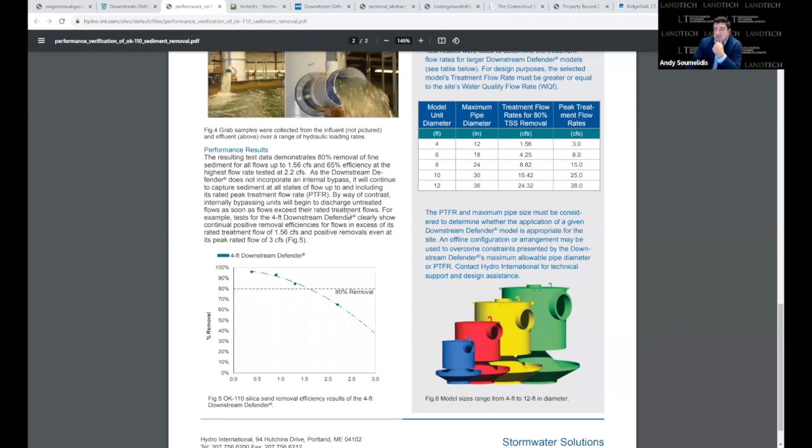So that's where you're getting the 50%. And that's probably what that literature says without reading all 50 pages. That's where it says the different stages of percentage. It's all based on the flow. Did I answer your question? Well, I think it's difficult to say because you're saying that's probably what it says without reading it. I mean, that's how the systems work. That's just the way they work. Maybe Mr. Pilch or Mr. Verbicus could chime in also. They probably design these systems as well. Just one point. Yes, I do.

Just one point. Your report says the 50-year storm was 2.78 CFS, not 1.8 CFS. And that's the flow that's going into the underground detention system, and obviously goes through the hydrodynamic separator. So I don't think you're being exactly correct by saying it's only 1.8. I'm going to pull it up.

I guess what Mr. Verbicus was saying is that the company literature can say one thing, but there can be outside testing that might say something else. But I should let Mr. Verbicus speak to that. Right, and NJCAT does that specific testing because groups like New York State DEC rely upon their testing to decide which systems are appropriate or function. Mr. Verbicus, did you have a comment on that?

Sure. Again, the percentage removal rates vary depending on what materials are being tested. As Mr. Trinkus had stated, a lot of the laboratory testing conducted by the manufacturers has a specific, for lack of a better term, mix of sand, gravel, silt, and so on, of varying sizes, and the manufacturers themselves choose what materials they feel are representative of what their product is going to remove. And that's why third-party testing is important.

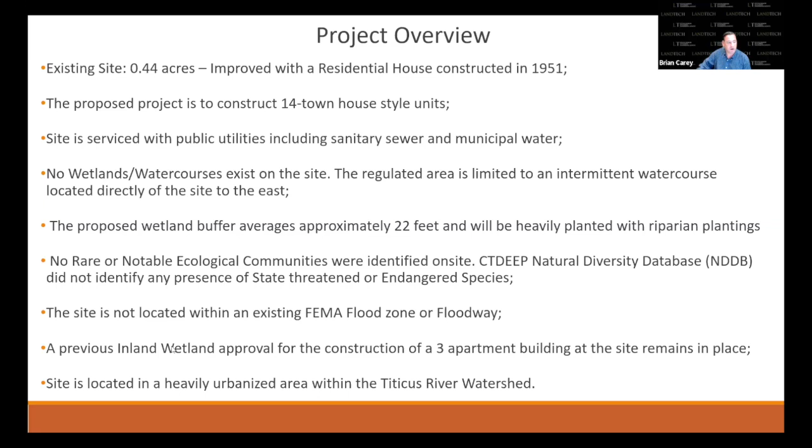The property is not located in the FEMA floodway, and it is not located in the flood zone. And the bottom line is there already is an approval to build a development on the property. So I think through all of the evidence and the professional opinions that Land Tech and the project team have provided to the commission and to the public, we've provided a project through multiple alternatives where we have established a highest and best alternative based on the most recently updated site plans. And we've entered substantial evidence into the record showing that there will be no impacts to the adjacent wetland or water course. That being said, I know that Jay Klein wanted to discuss some criteria that the commission has to consider as part of their decision-making process. Thank you.

Great. Well, thank you so much, Brian. Thank you, Andy. And again, thanks to everyone who's here with us tonight and has hung in there with us throughout the course of this summer. When was our first meeting? In June or late May?

I can't recall the date, but I remember we started that meeting by saying the wetland board's job is guided by section 10.2 of your regulations. Those are the factors that, when this hearing concludes, whether we continue on this evening or come back in a couple of weeks or 35 days, will guide your analysis. And I think it's imperative that we close with those, given their import. The first standard is the environmental impact on the regulated area. And the analysis, not just by Mr. Carey, not just by Mr. Soumelidis, but by Mr. Verbicus and the Southwest Conservation District, all indicate that there's no anticipated environmental impact to the offsite wetland.

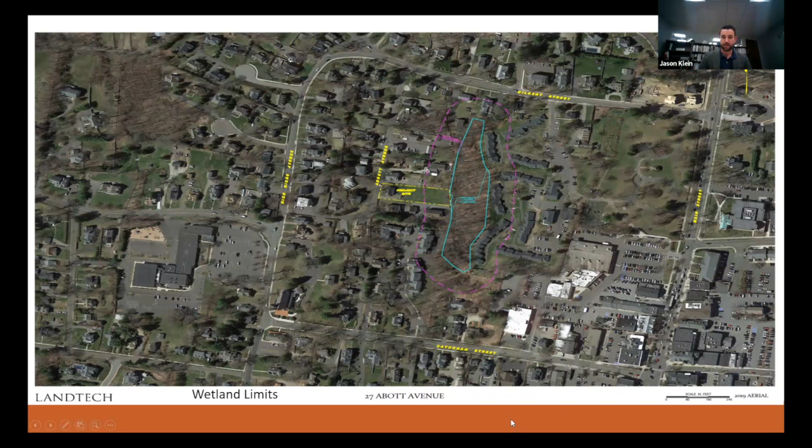This idea that it's protect the environment or approve the project—that's a false choice. It's not an either-or here. It's a both-and. We can protect the environment and provide the housing we need. We can do both. I think that in approving this project, you all will be sending a powerful message that yes, we can achieve that. And we look forward to this being a point of pride, not just for the folks on Abbott Avenue, but for the greater community at large.

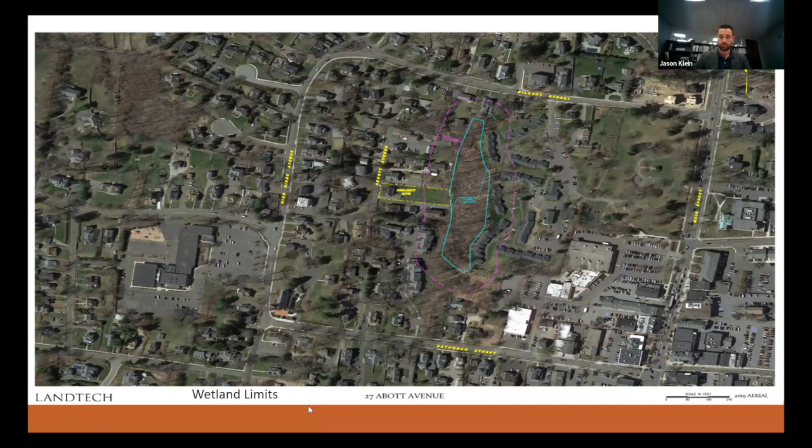Is there anything further from the board before we close the public hearing? Further questions? Do we think we have everything in the record we need? We could stay till midnight, I suppose, right? No, I'm just trying to be sure we have whatever it is we need, that there's nothing else.

Carson? Yeah, thanks, Susan. So there were some things that came in today that I haven't had a chance to review, so I haven't had the opportunity to formulate questions on those. I'm not sure there's anything we can really do about that at this point. We can talk about it in our deliberations, I suppose, but I wanted to point out for the record that there are some things in the record that I think at least myself, and probably some other board members, haven't had a chance to look at. I don't know if they're important or not, or exactly what the details are, but I guess that's the point.

Right. Mr. Klein? Yeah, I think that's a terrific point, Mr. Fincham. We work as quickly as we can, just as Mr. Verbickas gave us his comments as quickly as possible, and you all want to be informed in your decision. It's my experience that to the extent there are questions, those can be—well, we're not allowed to discuss this, obviously, Mr. Fincham—questions can be funneled to us through your staff, poor Artie and everyone else, they probably don't want to hear any more from us, but that's a way to transmit questions to the extent there are any. Great, thank you.